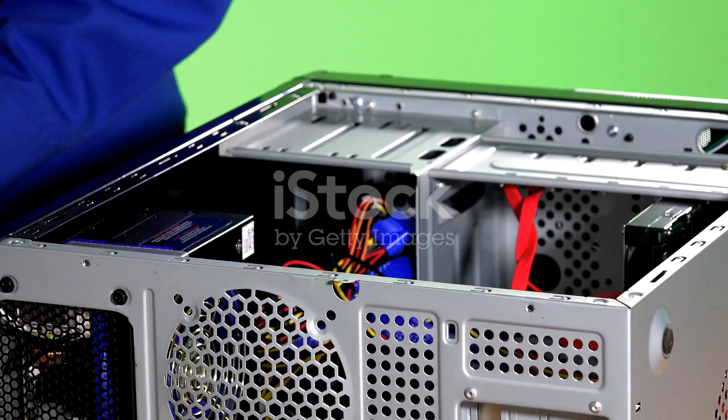We live in a digital age. Computers are everywhere. They power our phones, cars, and even our homes. Ever wondered about the magic happening inside these machines? This is where understanding computer organization and architecture becomes crucial.

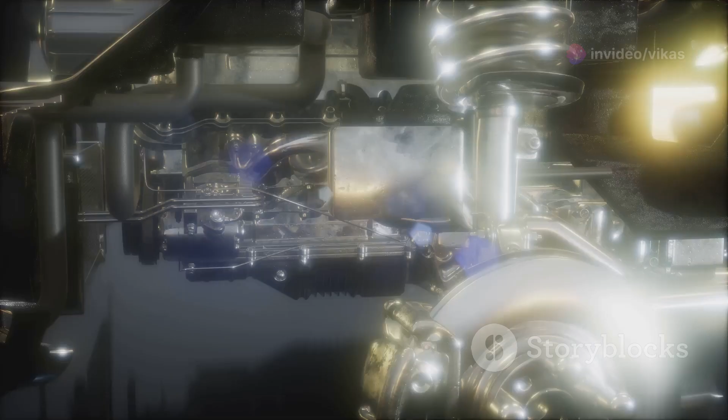It's like peeking under the hood of a car. We get to see the engine, the transmission, and all the parts working together. Similarly, computer organization and architecture reveal the inner workings of a computer system.

This knowledge is key for anyone interested in computer science, software development, or just understanding the technology that shapes our world. Let's embark on this journey to demystify the fascinating world of computers.

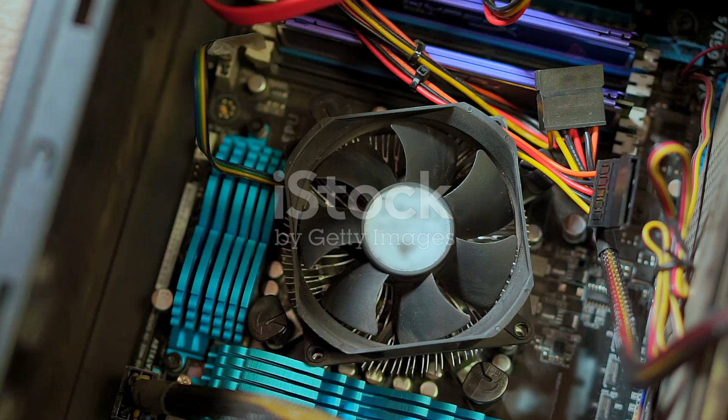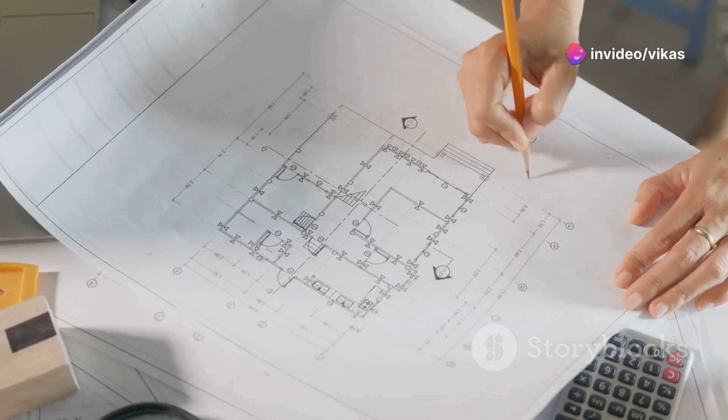Often used interchangeably, computer architecture and computer organization are distinct concepts. Imagine building a house. The architecture refers to the design, the blueprint, the number of rooms, their layout. It's the grand vision, the overall plan, that dictates what the final structure will look like and how it will function. This is analogous to the computer's architecture.

It defines the system's functionalities, the instruction set, and data representation. Just like a house blueprint, it outlines the essential components and their interactions, ensuring everything works harmoniously.

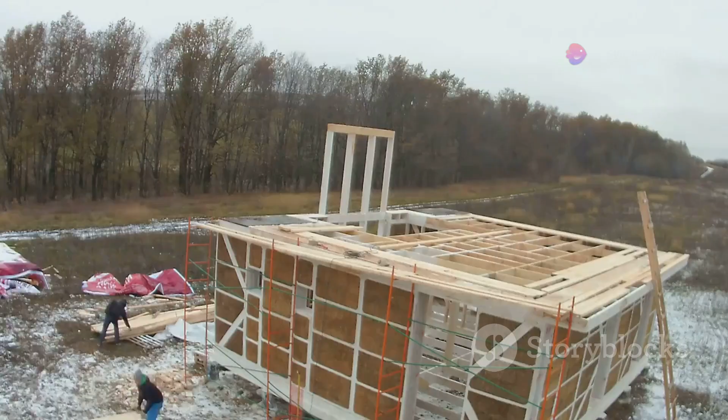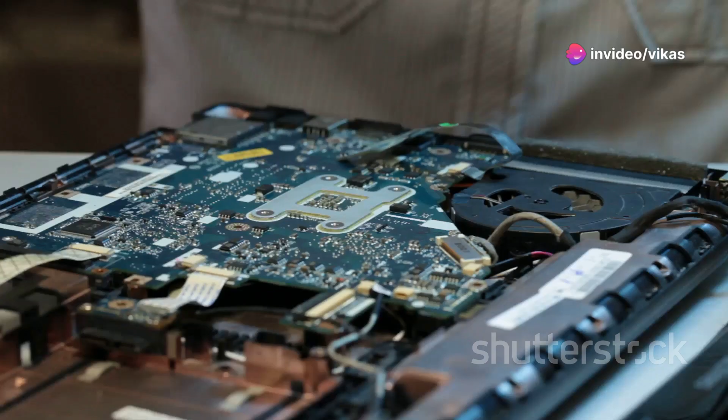Now, think about how the house is built, the construction process, the order of tasks, the tools used. This involves the practical steps, the materials, and the methods employed to bring the blueprint to life. This is akin to computer organization.

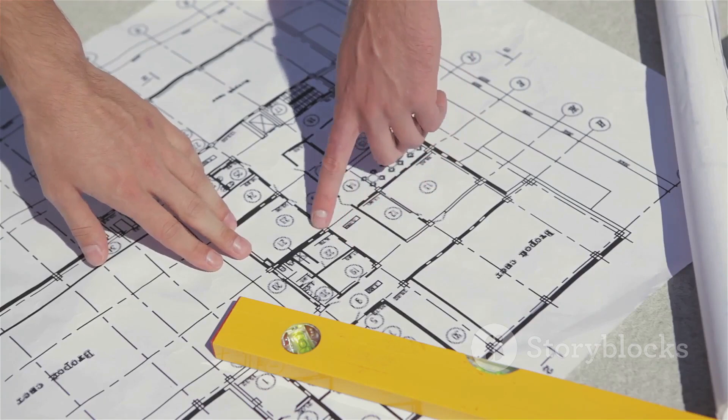It deals with the interconnection of components, their control signals, and how they collaborate to realize the architectural specifications. It's about the nitty-gritty details, the actual implementation of the design. In essence, architecture is the what, and organization is the how.

The architecture provides the vision, while the organization ensures that vision is executed effectively. A robust understanding of both is essential to grasp the complete picture of a computer system.

Without a clear architecture, the system lacks direction. Without proper organization, the architecture remains a mere concept, never fully realized. Together, they form the backbone of any successful computer system, ensuring both innovation and functionality.

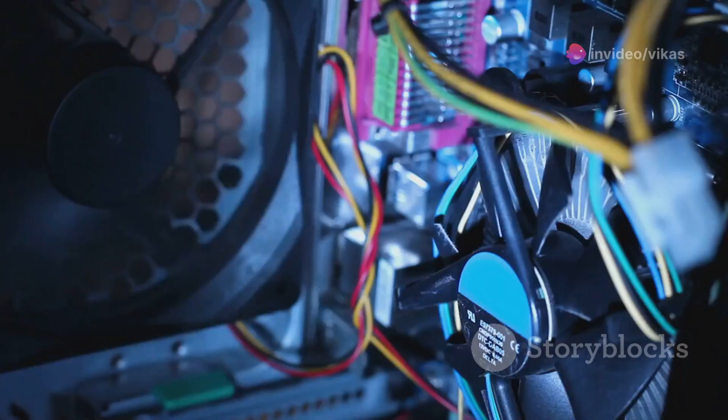A computer system comprises several functional units, each playing a crucial role. These units work together seamlessly to ensure the system operates efficiently and effectively. Think of a computer as a well-coordinated team, where each member has a specific task, but collaborates to achieve a common goal.

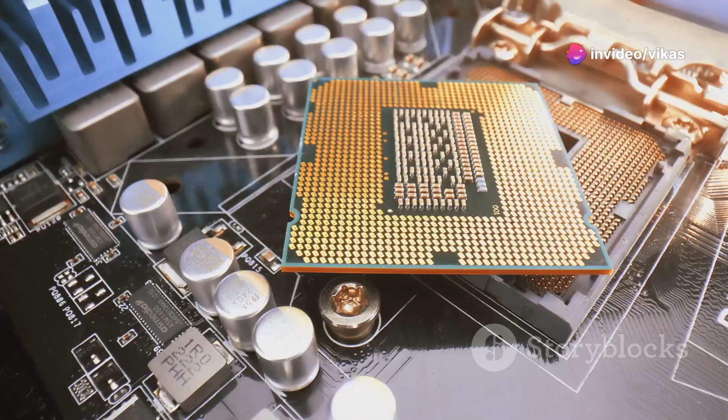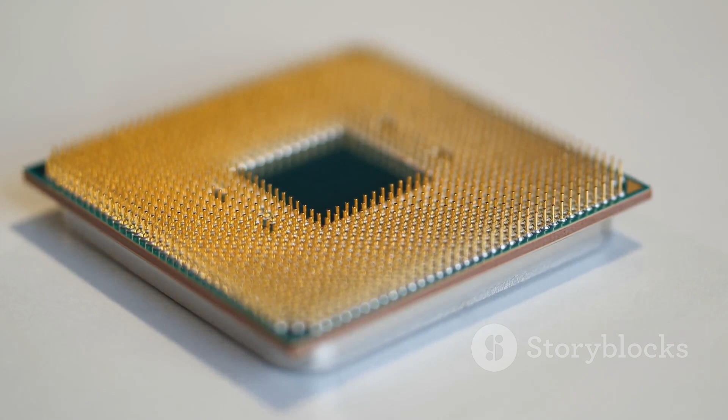First, we have the brain, the Central Processing Unit, or CPU. This is the powerhouse of the computer, responsible for executing instructions and processing data. It performs arithmetic, logic, and control operations, directing data flow within the system. The CPU ensures that all tasks are carried out efficiently and accurately.

Next is the memory, the storage unit. This is where the computer stores data and instructions that the CPU needs to access quickly. It holds data and instructions needed by the CPU, acting as a temporary storage area that the CPU can access rapidly. Imagine it as a massive library with shelves containing information. Just like a librarian retrieves books, the memory fetches data for the CPU.

Then comes the input/output, or I/O unit, the communicator. This unit manages the exchange of data between the computer and external devices. It allows the computer to interact with the outside world, receiving data from devices like keyboards and displaying results on monitors. This interaction is crucial for user input and output.

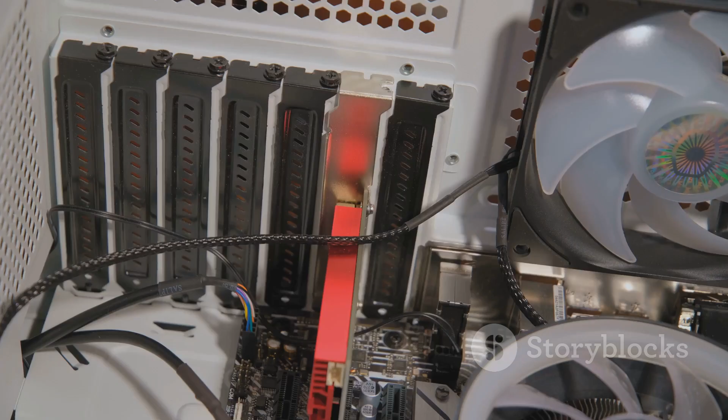These units are interconnected, working in harmony to execute programs and perform tasks. The seamless integration of these components ensures the computer operates smoothly. Understanding their individual roles and collaborative functioning is fundamental to comprehending computer organization. Each unit, while performing its specific function, contributes to the overall efficiency and capability of the computer system.

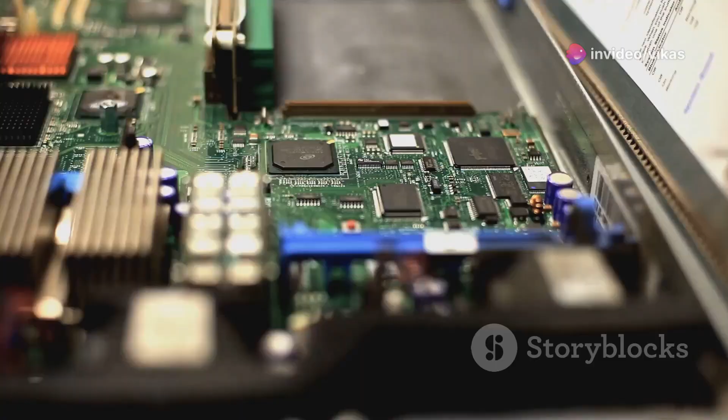Data needs to travel between different parts of the computer. This is where buses come into play. Imagine a bustling highway system within the computer, facilitating data transfer. There are three main types of buses: address bus, data bus, and control bus.

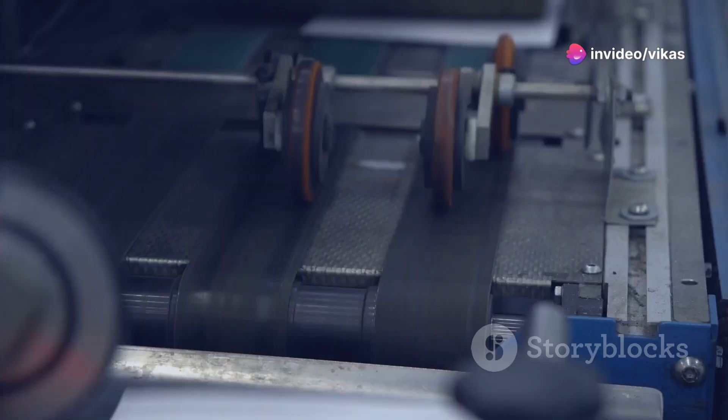The address bus carries addresses of memory locations. Think of it as a postal service, delivering addresses to access specific data. The data bus is the highway where data travels between components, like trucks carrying goods to different destinations.

The control bus carries control signals that manage and synchronize the operations of various units, acting like traffic signals, ensuring smooth data flow. The bus structure ensures seamless communication and coordination, making the computer a well-oiled machine.

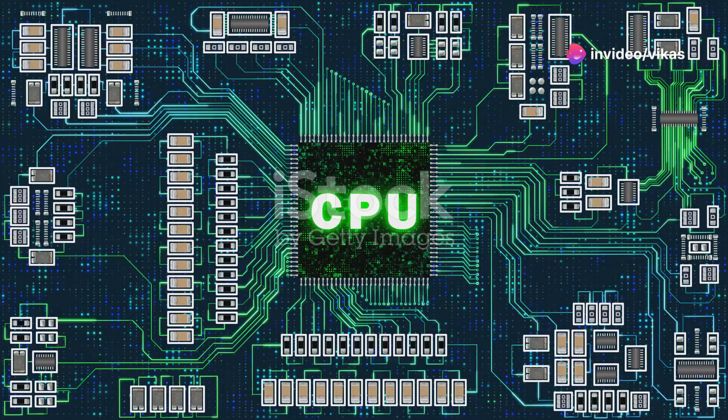A computer program is essentially a set of instructions. But how does the CPU execute these instructions in the right order? This is where instruction sequencing comes in. The CPU follows a fetch-decode-execute cycle.

First, fetch. The CPU fetches the next instruction from memory. Then, decode. The fetched instruction is decoded, understanding the operation to be performed. Finally, execute. The CPU executes the decoded instruction.

This cycle repeats, ensuring instructions are executed sequentially, much like a conductor leading an orchestra, ensuring each instrument plays its part at the right time.

When accessing data in memory, the CPU needs the correct address. This is accomplished through various addressing modes. Think of trying to find a specific book in a library. You could go directly to its shelf, which is direct addressing, or you could follow a series of clues leading to its location, which is indirect addressing.

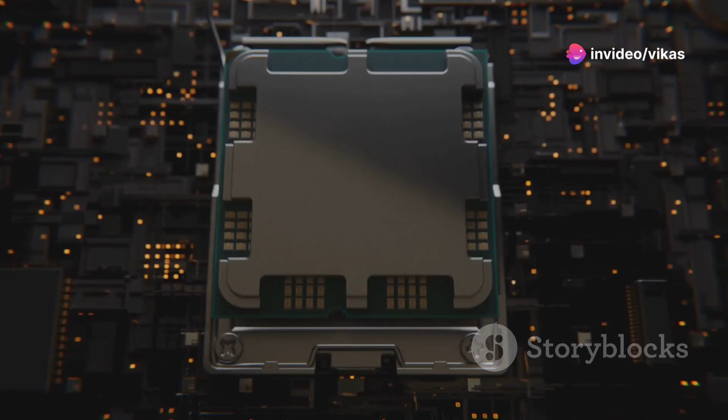Similarly, different addressing modes offer flexibility in how the CPU accesses data. For example, immediate addressing uses the operand itself as the value, while register addressing uses the value stored in a CPU register. Understanding these modes is essential for efficient programming and memory management.

There are two primary architectural philosophies: RISC, which stands for Reduced Instruction Set Computing, and CISC, which stands for Complex Instruction Set Computing. Imagine RISC as a minimalist approach. It uses a smaller set of simple instructions, each executed quickly. CISC, on the other hand, is like a comprehensive toolkit with a wider variety of complex instructions.

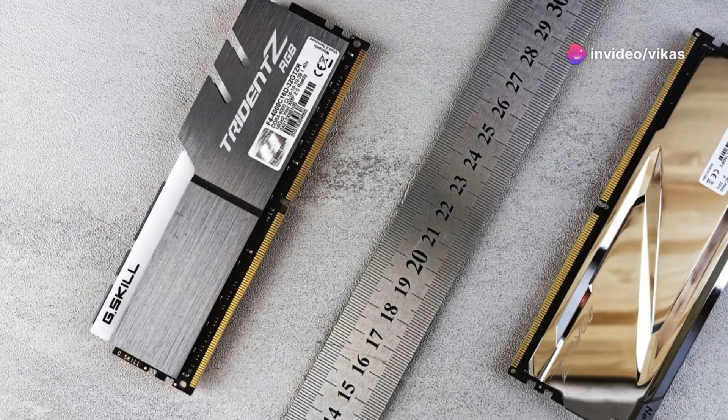Both have their strengths and weaknesses. RISC architectures excel in speed and efficiency for simpler tasks, while CISC architectures are well suited for complex operations with fewer instructions. The choice depends on the specific application and design goals.

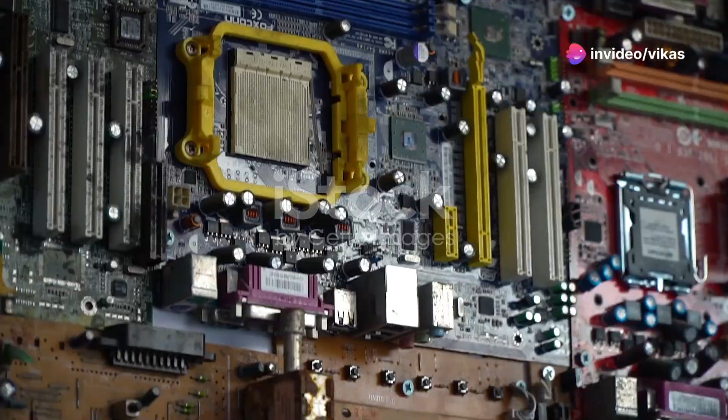This module provided a foundational understanding of computer organization and architecture. We began by examining the basic components that make up a computer system, such as the motherboard, CPU, memory units, and various input/output devices. We explored the difference between the two, understanding how each component interacts with others to perform complex tasks.

We also looked at how different computer systems are designed to meet specific needs, from personal computers to large-scale servers. We delved into the roles of functional units, such as the arithmetic logic unit (ALU), control unit, and memory unit, and how they work together to process information. This included a detailed look at how the CPU executes instructions and manages data flow.

We learned how data travels within the system, from input devices through the CPU and memory, and finally to output devices. This journey of data is crucial for understanding how computers perform tasks efficiently. We examined how instructions are executed, breaking down the process into fetch, decode, and execute cycles. This helped us understand the step-by-step operations that occur within the CPU.

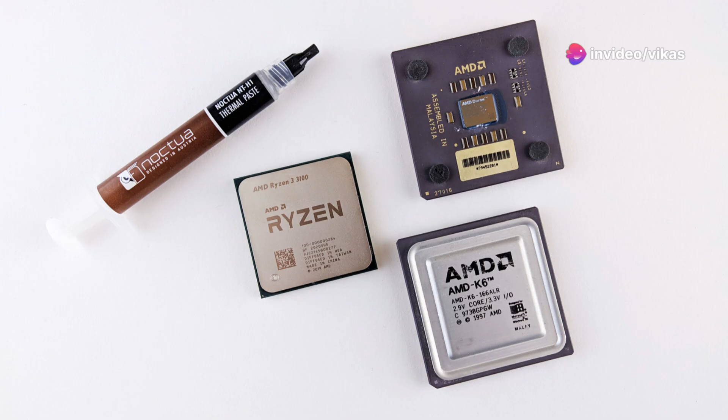We also explored how addressing modes provide flexibility in data access, allowing the CPU to efficiently retrieve and manipulate data stored in various memory locations. Finally, we touched upon the contrasting philosophies of RISC and CISC architectures. We compared their design principles, performance characteristics, and how they influence modern computing.

This knowledge is invaluable for anyone seeking to unravel the complexities of computer systems. It provides a solid foundation for further study and practical application in the field of computer science. Whether you're a budding programmer or a tech enthusiast, understanding these fundamental concepts is a stepping stone to navigating the fascinating world of computers. It equips you with the skills needed to innovate and solve real-world problems.

Understanding these principles also helps in making informed decisions about hardware and software, optimizing system performance, and staying updated with technological advancements. Remember, just like understanding the building blocks is crucial for constructing magnificent structures, comprehending the intricacies of computer organization and architecture is essential for creating efficient and powerful digital systems.

Comprehending computer organization and architecture opens up a world of possibilities in the digital realm. It lays the groundwork for innovation, enabling us to build smarter, faster, and more reliable systems that drive the future of technology.